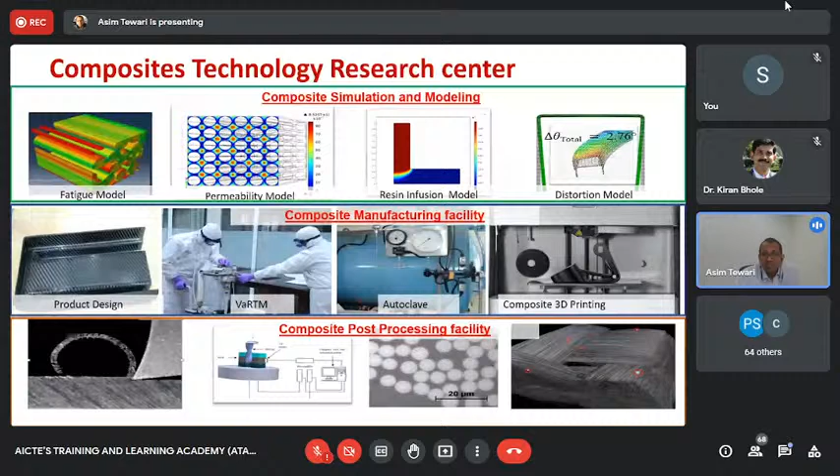So additive manufacturing in composites is also what we do. Then we do tomography, 3D tomography, looking at the microstructure in 3D, machining and post-processing, and also finite element analysis-based life estimation. Another very big area of research in my group is in machining.

We do all sorts of machining, be it milling, turning, drilling. We have instrumented 5-axis machines which can measure forces, torques, temperatures, vibrations, acoustic emissions while performing the machining operation, and thermal imaging. You can look at that and create an understanding of how machining is happening, what are the underlying mechanisms.

We have a lot of experience in machining of titanium alloys as well as machining of super alloys, Inconels primarily, and Invars. So this is another very big activity. We may not really be talking about it today, but it's good to know such things are being done.

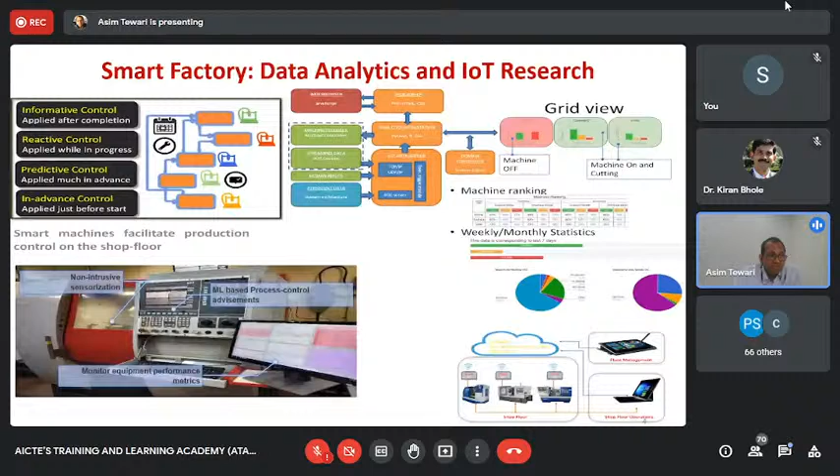Another very big area my group is involved in is smart factory, IoT, and ML. Machine learning and aspects associated with the Internet of Things have become an integral part of our daily lives. We have an entire group developing newer smart IoT devices installed on various systems. They send real-time data to the cloud, and the cloud performs machine learning-based analytics on it. It's a very, very growing field - I'd say this is growing faster than anything else. These are just to show some aspects we're involved in regarding machine learning.

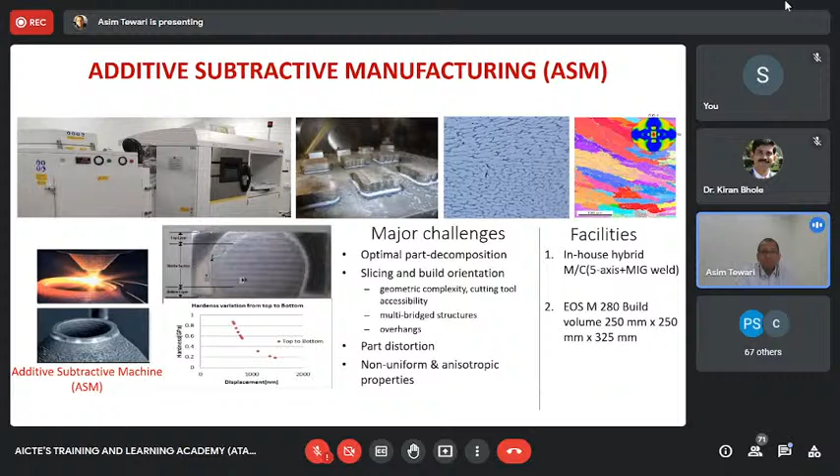This is a 5-axis additive subtractive machine, meaning you can do addition as well as subtraction right in the same machine. It has capabilities of both powder and wire feed, and we can do pretty much any alloy - aluminum, titanium, nickel, iron, even copper has been tried on it. This uses a laser source and is a directed energy deposition based system.

This is, of course, not our machine. What you see is a representative image, but our machine is going to be here by 2022. These are the various things which you can achieve on that.

As I was showing, you have a powder feed as well as a wire feed. The beauty about wire feed is that wires have lesser surface area - at least 5 to 6 orders of magnitude lesser, actually 10 orders of magnitude lesser surface area. Because of that, they do not get contaminated by oxygen.

If you are doing powder-based additive manufacturing, you need to create a very high quality inert atmosphere around it. Whereas in wire feed, you really don't need that, because wire has very little surface area and you can get a very high quality part with very little environment around it. Of course we will still have an inert environment, but it's not as much of an issue with wire.

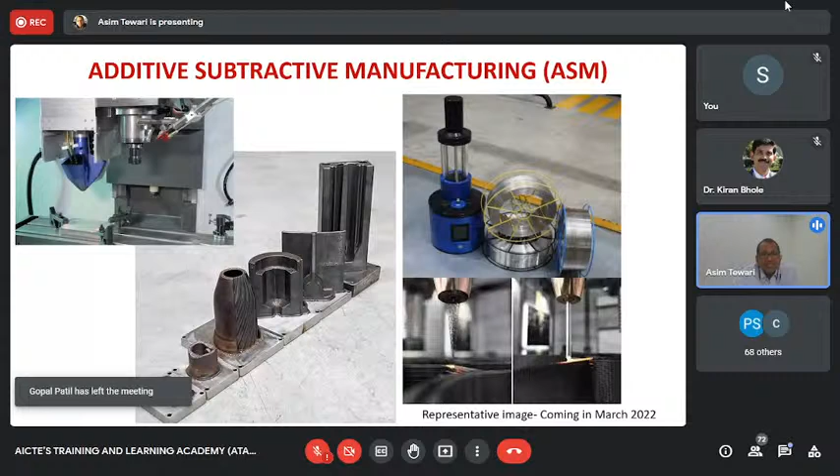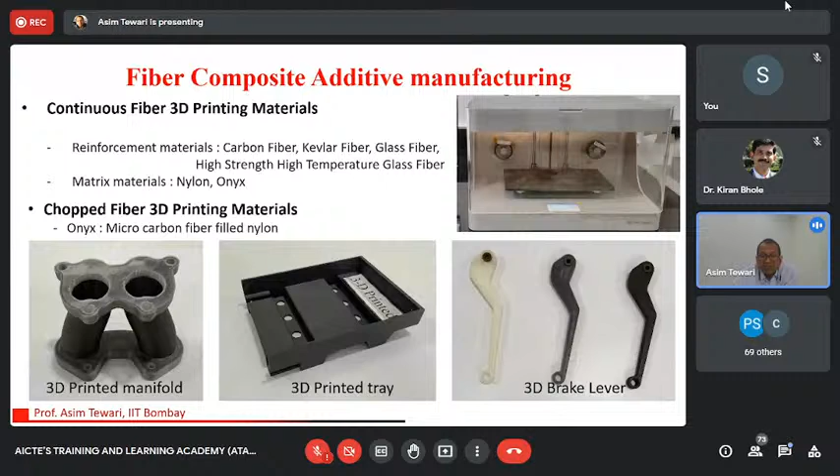So we can actually print carbon fibers, Kevlar fibers, glass fibers, even high strength high temperature glass fibers. There are many different fibers which we can add and print, and there could be many other complexities you can build around it.

Now, coming to what I wanted to talk to you about today - residual stress, which is one of the biggest challenges for additive manufacturing. Let me start with a great real-life story which my center was involved in, NCAIR. This is the drilling-induced distortion.

I would like you to not just listen to this as a presentation going on, but to spend some time and try to understand what I'm showing you right now. This is a very exciting detective novel, in a sense - you're trying to understand what is going wrong.

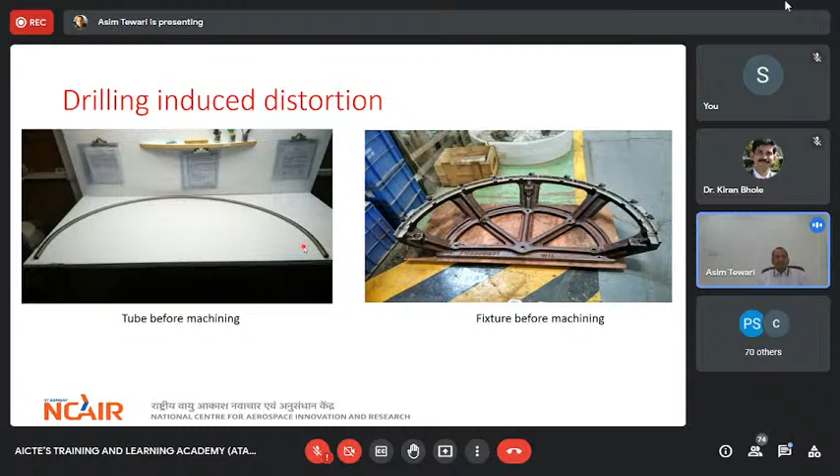So now you can understand, we have this hollow part of titanium made by forging and metal processing. We put it on this fixture and do machining of it. This fixture goes into the CNC machine, and this is the CNC head with the drill tool, and we are drilling holes in it.

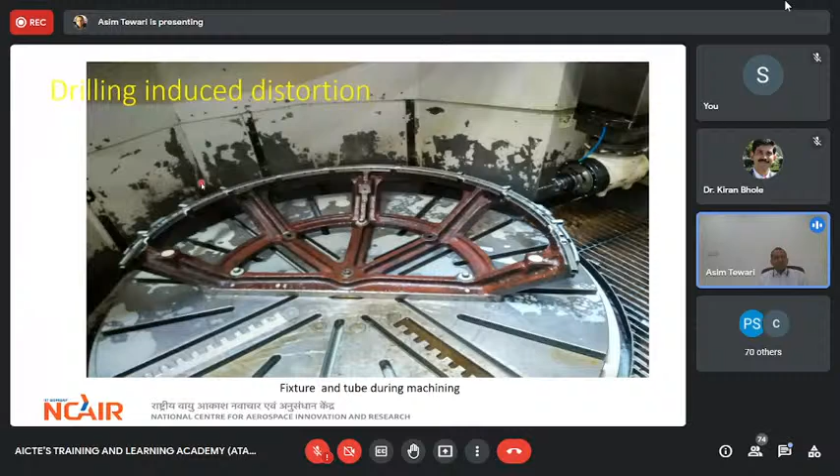When we drill holes in it, everything is perfect. Then when we take it out, it has holes in it. But once we take it out, we see that it has opened up by 20 mm. This is a real life problem. Can anyone think why this is happening?

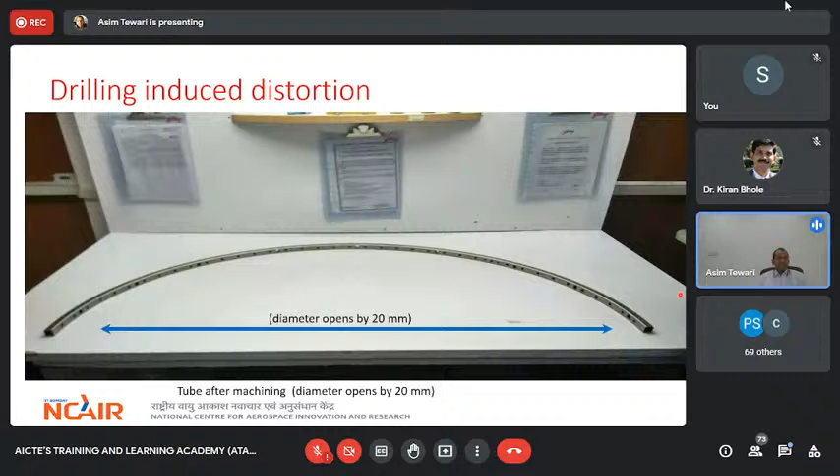What is happening is you have this part, taken to the CNC machine, and after drilling holes, when you take it out of the fixture, you realize it opens up. Why is this happening? This is literally like a mystery which you don't understand why. So if you think about drilling, what you realize is that you are basically having tensile residual stresses and compressive residual stresses.

Both are essentially, in this case, tensile. So you have tensile residual stresses outside and tensile residual stresses inside. This has tensile residual stresses both outside and inside.

What is happening is that because of your machining, you are removing the material, removing part of the material which is outside, and removing it from inside as well. So now we have residual stresses both inside and outside.

In the initial case, they are both balancing each other. The residual stress outside in the periphery of that pipe and the residual stress inside the periphery are exactly balancing each other. Why? Because it's a residual stress - there's no external stress, right? So they have to balance each other out. And since they balance each other out, there is no distortion. It remains like that.

Now what happens is that when you see what is the length inside, you realize the inside arc is smaller and the outside arc is larger in perimeter. Since the outside arc is larger and the inside arc is smaller, the inside has higher stress density due to smaller circumference. So the total forces are the same, but stress per unit length inside is more compared to outside. Now this is a unique understanding.

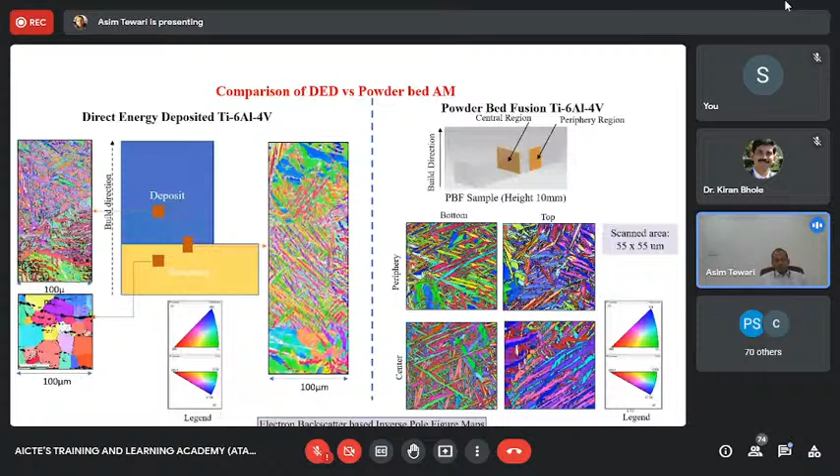We wanted to see how the microstructure looks, and this is how it looks. There's a substrate, and on top of it we have the deposited material. The substrate has a slightly different microstructure from the deposited material, though the deposited material has a somewhat similar structure, with the exact coarseness varying depending on the process window.

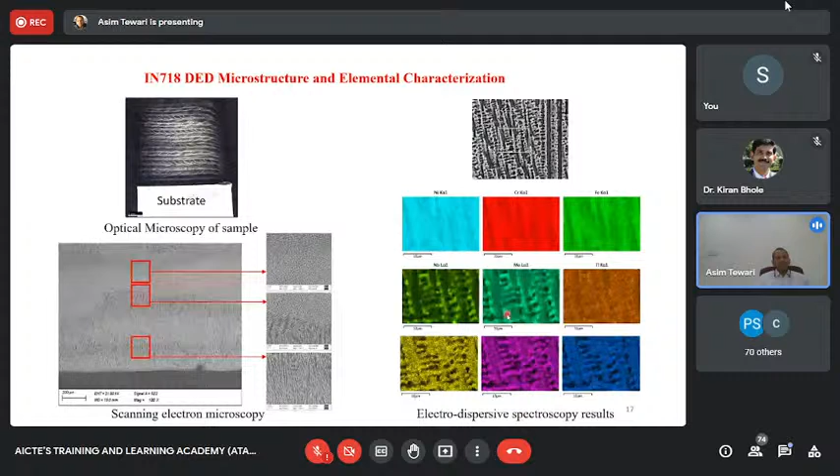This also leads to variations in chemical composition, which is what I'm trying to show you: iron, nickel, chrome, niobium, and moly, and how they change as a function of space. You can see that.

Now, moving forward, we are looking at these samples from a structural tensile point of view, to see how they will perform under structural loading. We performed various process variations, produced these parts, and performed tensile tests. This is just to lay the basic background. I don't want to get into all the experiments, but this is one I want to highlight.

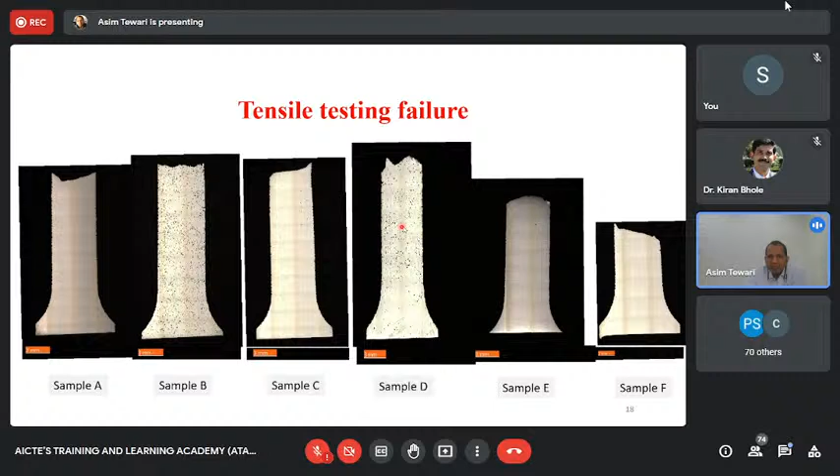If you look at the fracture surface once the sample fails, you can see evidence of porosity on it. If the fraction of porosity on the fracture surface is more than the fraction of porosity in the cross section of any plane, it means the fracture surface is following the porosities, which are getting bridged to form the fracture surface. This is what we see in almost all these samples, that porosity plays a dominant role in leading to fracture.

So that's why we realize one of the biggest challenges in additive manufacturing becomes porosity, and porosity, of course, triggers fracture.

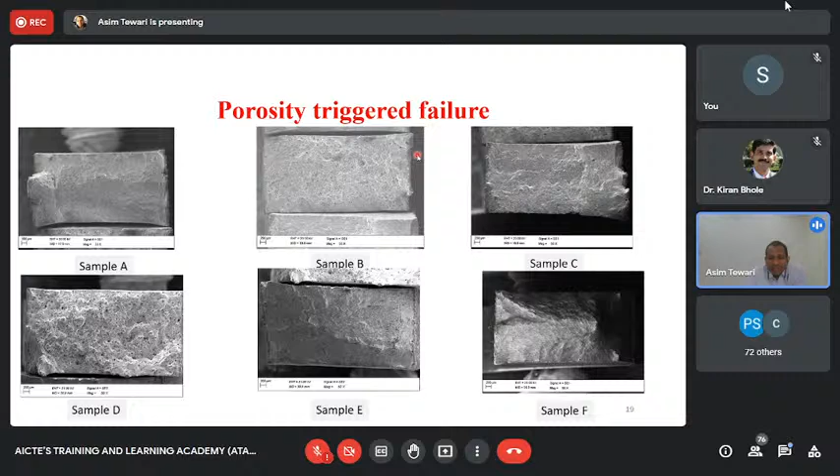Now another very strange thing we have seen is that there are lots of cracks. If you see this, you can see a crack coming. These are additively manufactured parts through directed energy deposition, Ti-6-4 and other materials, and we see these cracks coming in them. This is very strange—why would a crack come? A crack means the material broke.

But it usually breaks when we put it under a tensile test. Here we have not done any of those things, so why is it breaking? That's where we realize it is breaking because of internal residual stress.

There are internal stresses which make the material crack. So the two biggest shortcomings of additive manufacturing for properties are porosity and cracks, which essentially come because of residual stresses. Of course, surface finish is another big issue—you don't get a beautiful surface finish as you get in machining. And that's why we are going for additive subtractive machining.

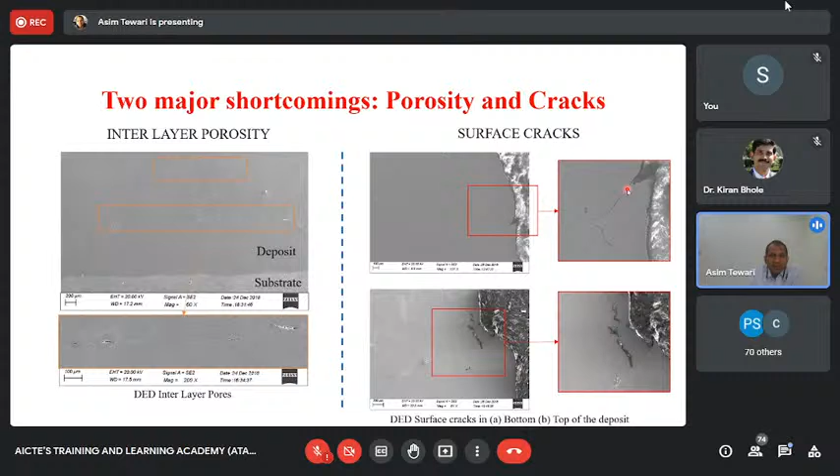So our machine, which we are about to install, is essentially an additive subtractive machine, which will be doing both the additive part as well as machining right on the same structure.

Now, having said that, we have many other issues also, which are really very challenging and very interesting. Those are primarily the CAM issues in additive subtractive machining—for instance, the geometrical complexity, cutting tool accessibility, multi-bridge structures and overhangs. How do you handle that in additive manufacturing?

These things cannot be done on a design-by-design basis. There has to be an inherent algorithm which will automatically provide a solution to these problems.

Now, in 5-axis additive manufacturing processes, directed energy additive manufacturing process, your bed itself can be tilted in any direction. So when you're doing any deposition, you are in a position to turn and tilt it in any direction, and thus you can create any orientation you like, which means you have far more versatile possibilities of build orientation.

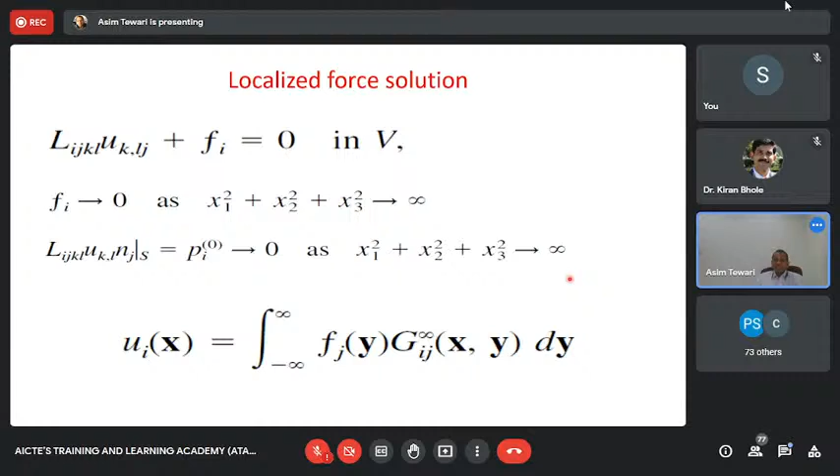Now I've talked about a lot of things, and I don't think you'll be able to follow this completely. But that was the basic requirement, and now we come to the basic understanding of the term eigenstrain. If by the end of today you're able to understand eigenstrain, and that eigenstrain relates to residual stress, then you'll be able to figure this whole thing out. So what did we say?

At a very coarse level, we said residual stress is a big problem in additive manufacturing, which leads to cracking. Additively manufactured parts can crack because of residual stresses—those are internal stresses which break it. Because we talked about stresses, we need to talk about solid mechanics. So I showed you some equations of solid mechanics. After seeing those equations, you'll ask where residual stresses come into that solid mechanics. I just had stress related to strain by stiffness. That's it, basically, no big deal.

So now I'm going to introduce a concept, and the next 3 slides are, I think, the most important slides. Feel free to stop me—I have another 80 slides, but those are not so important. I will share all of this with you, so you'll have those slides. But this one and the next two are the most important slides. This is where your concept of a new term known as eigenstrain is going to come.

Eigenstrain is a generic name given to any inelastic strain. So any strain which is not elastic is called eigenstrain. Can you suggest possible ways eigenstrain can arise? The answer is yes—you could have eigenstrain as thermal strains, phase transformation strains, initial strains, and misfit strains. So any strain having an origin other than elasticity is an eigenstrain.

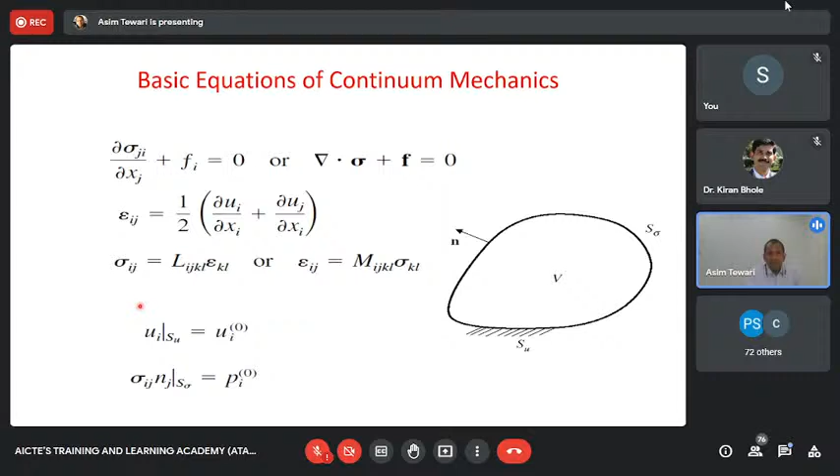All right, afternoon, after lunch may not be the best idea to talk about these equations probably.

So what you realize is that the strain which we called eigenstrain needs to be subtracted from the total strain. Total strain is made up of two parts: eigenstrain and elastic strain. We saw that there was an eigenstrain because of thermal expansion from heating. Since there was no constraint, the material was allowed to expand freely, which means the total strain was also equal to the eigenstrain, which means the elastic strain was zero.

Stress is not related to total strain, but stress is related to elastic strain. This is the main understanding you need to have: stress is only related to elastic strain, and elastic strain is the difference between the total strain minus the eigenstrain. In this case, the total strain was exactly the same as eigenstrain, so the elastic strain was zero, and since elastic strain was zero, there was no stress. Is that clear?

Are you guys understanding what I'm saying? Anyone? Yes, sir.

All right, now I will change the thing. What I'll do is have a part which is not allowed to expand. So it's no longer free, it is fixed from both sides. So I have a cylinder which is fixed from both sides now.

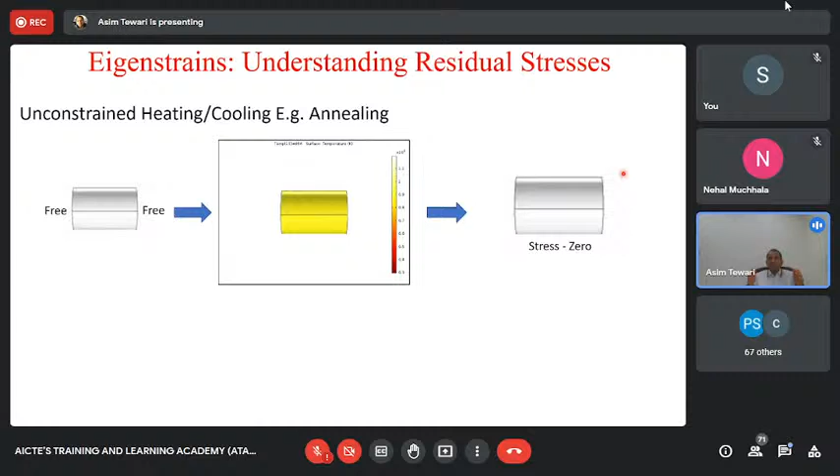So that is the basic understanding you need to have: in the free case, the elastic strain was zero, the eigenstrain was exactly equal to the total strain. In the fixed case, the total strain is zero because it's fixed, and because the total strain is zero, the elastic strain has to be equal and opposite in sign to the eigenstrain.

And what is the eigenstrain? Eigenstrain is the strain because of the expansion from heating. So eigenstrain is always a strain which comes from a physics other than the stress analysis physics. The stress analysis and solid mechanics are not adding anything to the eigenstrain. So the eigenstrain could be either because of coefficient of thermal expansion, phase transformation, or twinning.

There could be many other things which are beyond the scope of continuum solid mechanics, like plasticity. Of course, you can add this as a part of solid mechanics, but it's essentially coming from some other physics. So that strain will be provided to you by some other physics. This quantity, eigenstrain, is given by another physics. In this case, that physics is coefficient of thermal expansion, but it could be something else as well. Is that clear?

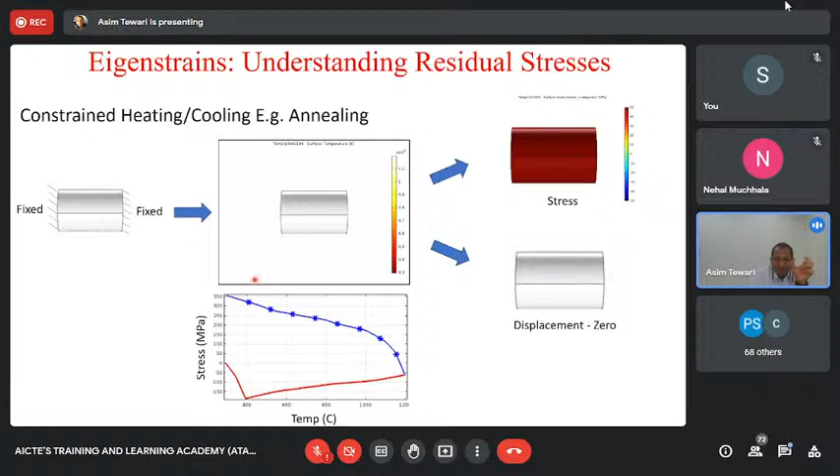I hope it is. Now I want to show you how the stresses change through a heating and cooling cycle. You go through a whole process of heating and cooling. What happens is that if you do heating, it may expand so much that, since it's fixed, it may yield. If it yields and now you cool it, it may actually become smaller in size. That's one of the key aspects you need to realize.

Another simple thing to understand is that the average stress in a volume, in this case the entire sample, is given by a traction boundary condition. If there is a force applied on my system from outside, given by sigma ij not nj, meaning a force in the I direction, then what I will see is a body with an average stress given by this stress tensor. Sigma ij not nj is the force I'm applying in the I direction. If the sample is under a traction boundary condition given by this force, then the average internal stress of the body, integrated over the entire volume, is given by this quantity.

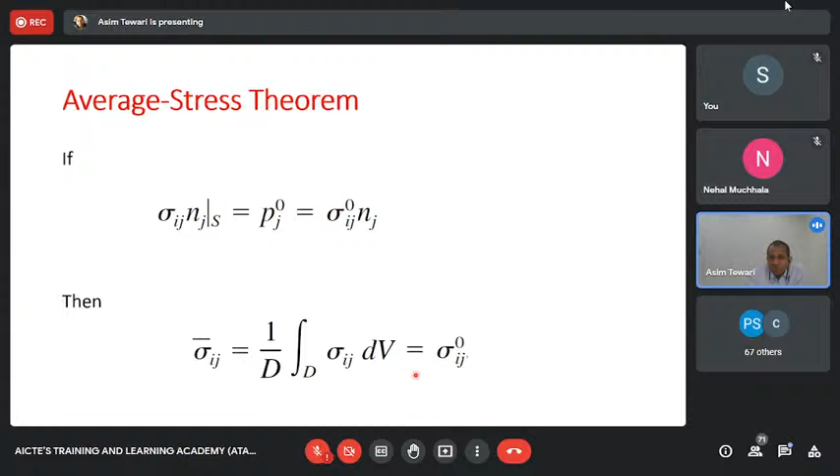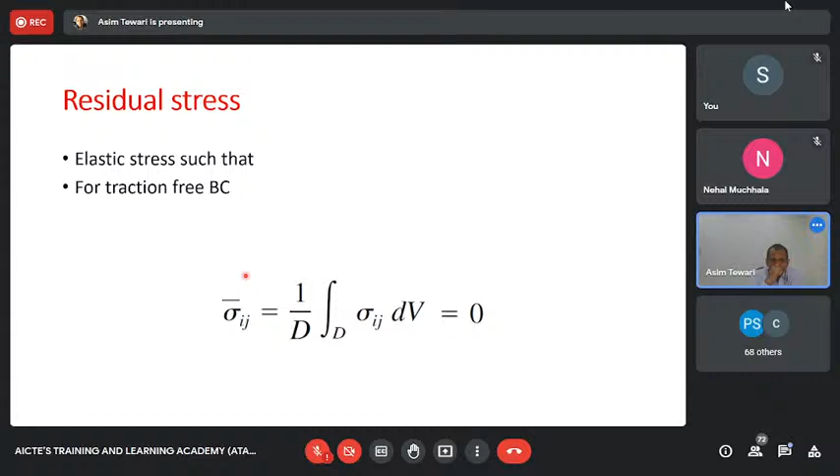Why am I talking about this? Because in a residual stress state, there is no traction - it's a traction-free boundary condition, there are no external stresses. Since there are no external stresses, this term is 0. That's why the average stress in a residual stress field, the average residual stress in a body, is exactly equal to 0. So if you have a tensile stress somewhere, you will also have a compressive stress somewhere else, so that the volumetric average of all those stresses becomes exactly 0. That's one of the key aspects you need to appreciate.

Let me now talk about the key aspects which play a role in the formation of residual stress. There's a moving heat source, which leads to a transient solution, and that creates complexity - it's essentially the same in welding, which I'll talk about in more depth. Phase transformation: you could have ferrite to austenite, austenite to liquid, liquid to austenite, austenite to ferrite, pearlite, martensite, bainite, tempering of martensite and bainite. All of these solid state and liquid-solid transformations could lead to a change in the eigenstrain, thus leading to stresses. So eigenstrains could be because of phase transformation, solid-liquid transformation, thermal expansion, or constraints from the outside, and they can also change the entire strain - not the eigenstrain, however, because eigenstrains don't really care about external constraints.

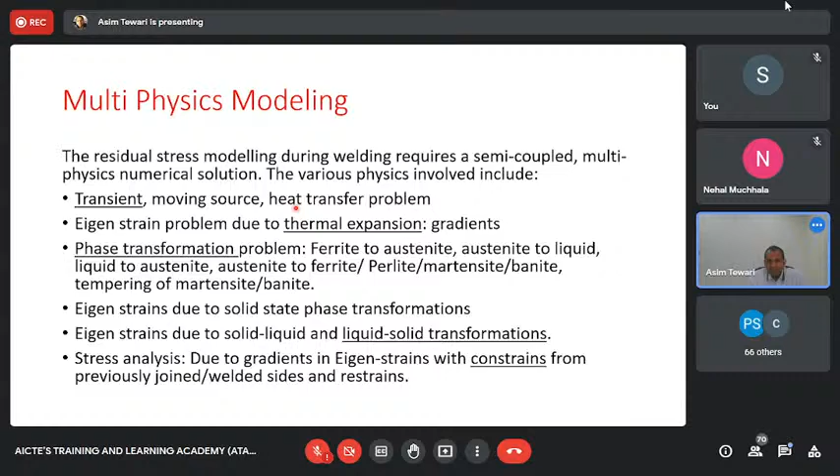This is a very simple model, and I'll talk about a more complex version when we get into finite element based modeling. This is a very, very simple 3-bar model, which is often used in welding. What this model shows is how welding results in residual stress.

The question is, when you're welding two parts - let's say you're not adding any filler material for simplicity, you're just heating a part - that part gets heated up, then it melts, then it solidifies, and that's it. Now you'd expect it to have residual stresses. The question is, do you really expect residual stresses just because you heated it up from room temperature to high temperature, and then cooled it back down to room temperature?

So you've brought it back to the same place where you started from. And if you've not added any material, should it still have residual stresses? The answer is yes. It will have residual stresses, provided that when you heated it up, it went to a place where irreversible transformations happened.

Let me talk about what is happening. This can be handled by a 3-bar arrangement: bar 1, bar 2, bar 3. These are just to show you how this material is being modeled. The welding gun goes from the center, and when we do that, the center part will get molten, while the other two bars will just get heated up but will not melt.

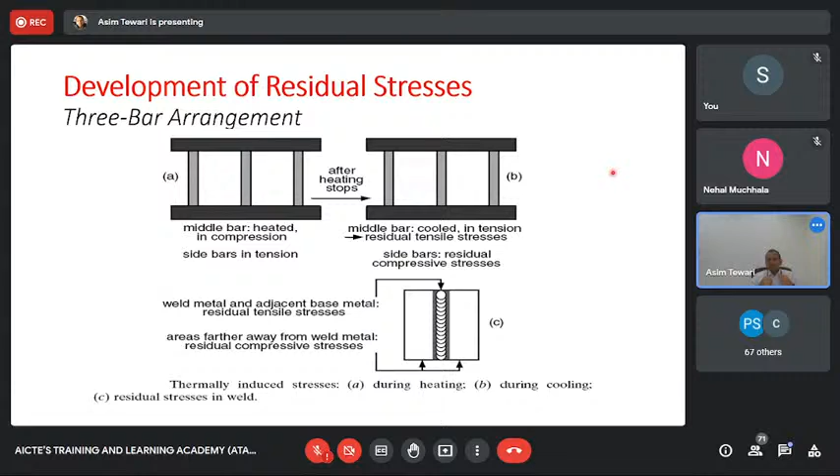Probably I've been speaking a lot. You hopefully get a picture.

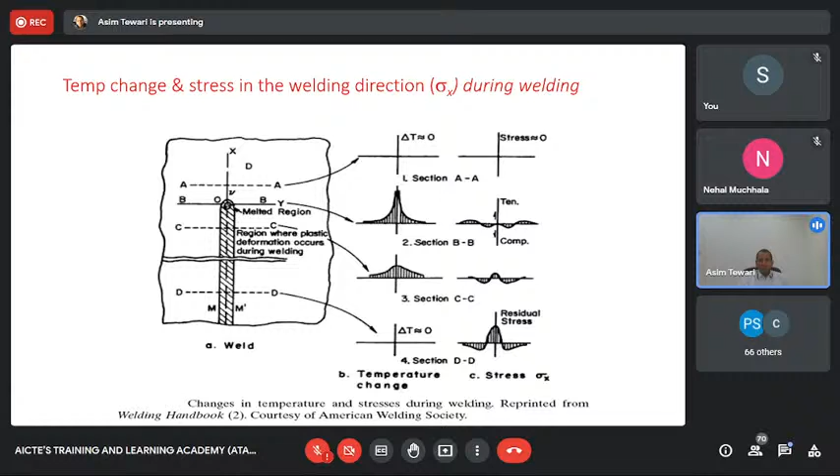Now, had there been no melting in the central pool, then we could have avoided residual stresses, but not always. Why? Because residual stresses didn't happen just because of melting, but could have also happened because of plasticity. And that is another more complex aspect beyond the scope of today's discussion. So coming back now, this is how the residual stresses in butt welds vary. Residual stresses vary like this.

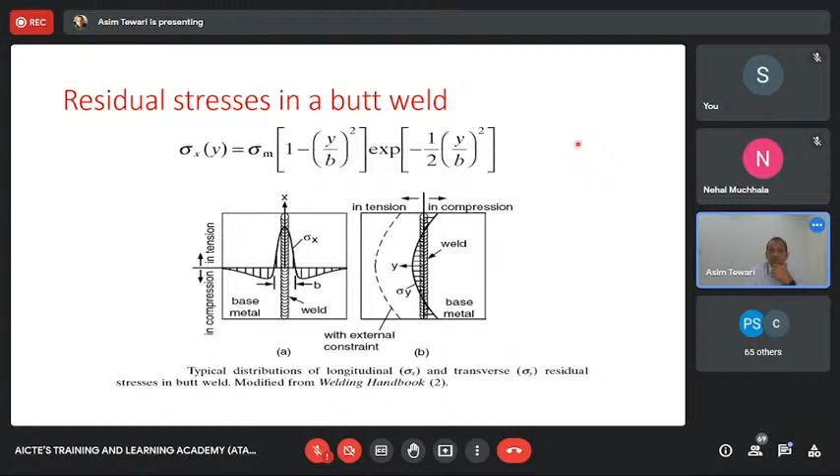And why does this happen? This happens because of many mechanisms. One of them is that heat is provided, and this is leading to what has happened. So what is happening is that you are having heating, and the heating is causing the atoms to move, and the stress goes through a stress relieving process.

So the temperature exposure at a long enough time causes the heat to relieve residual stress. And there are many mechanisms involved. Plasticity is one. Why? Because when you heat it up, the plasticity of the material falls down, the yield stress falls down. Another mechanism is creep, in which the material starts flowing because of creep. You also have stress relieving because of dislocation movements. Your dislocation mobility increases. So a lot of things happen which lead to reduction in residual stresses when you expose something at a high enough temperature for a long enough time.

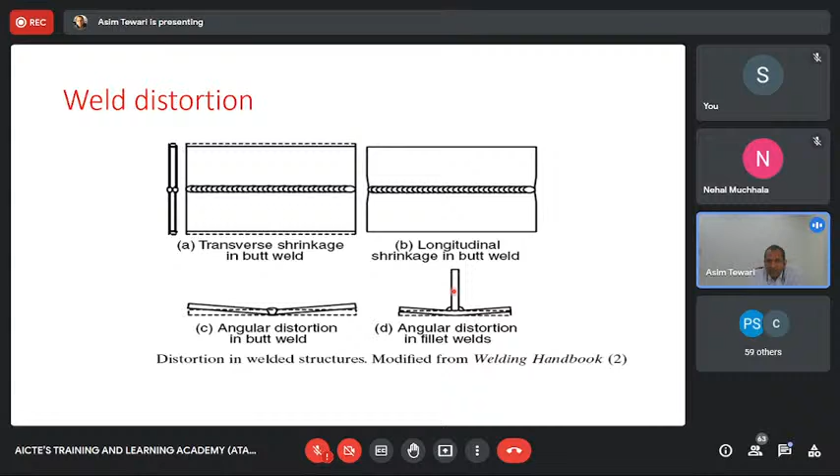Now I'll quickly talk about what kind of distortions you'd expect. If you've seen the three-rod case, you should understand how residual stress leads to distortion. Looking at this plate, the center has been welded from the top, and once it cools down, it creates a tensile residual stress in the center. The tensile stress pulls everything down, and because of that, the originally flat plate becomes distorted like this. You can think of the same for a T-joint, which leads to similar distortion.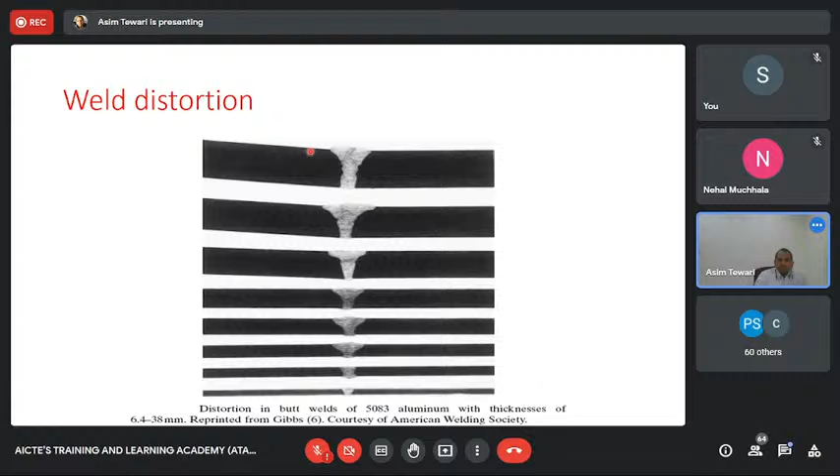How would the distortion be affected by thickness? If it's very thick, you get large distortions. What are distortions, by the way? They're nothing but the stress relieving of residual stresses. Distortion happens when the residual stresses are asymmetric. The moment you take it out of the fixture, the asymmetric residual stresses relieve themselves, leading to distortions. So a distorted material has fewer residual stresses, but the geometry is unacceptable. A very thick part leads to larger distortions; a very thin part leads to much less distortion. This shows how the filling and other things change.

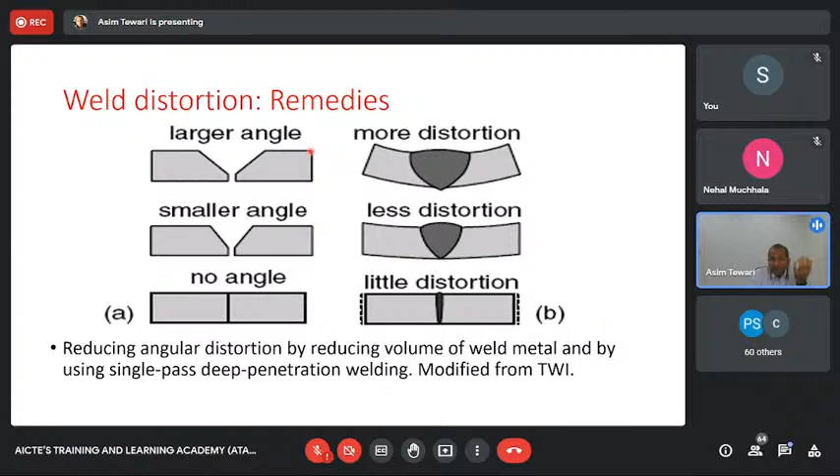Now this is for welding, but not very different things happen in additive manufacturing, and that's where additive manufacturing strategies come into play. This shows how various welding strategies are changed - adding material here, then there, adding all on one side first then the other, versus adding once below, once above, alternating - and you realize this has much less distortion.

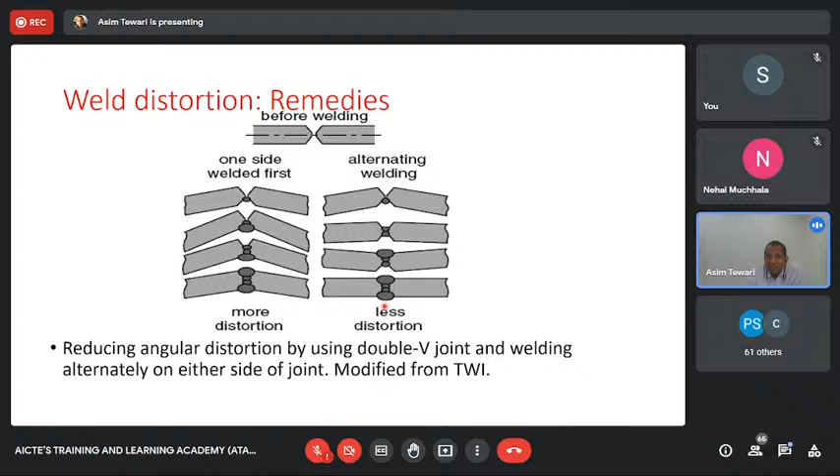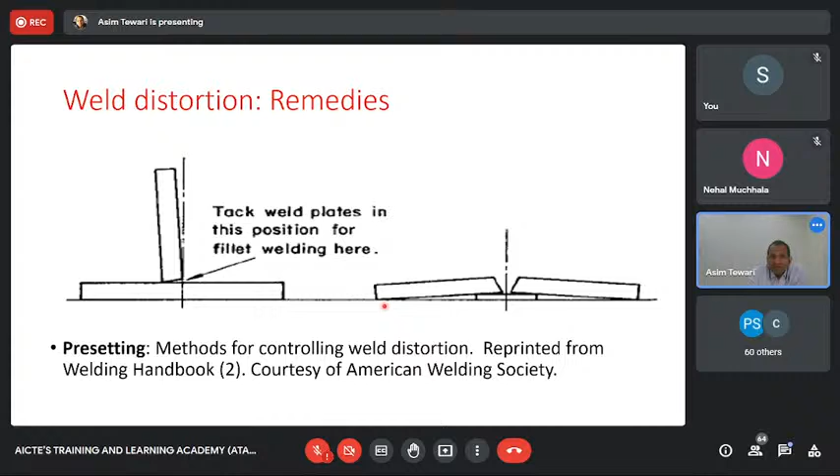Now, you need to realize that having no distortion doesn't mean you have no residual stresses. As a matter of fact, you could have more residual stresses, and you're likely to have more if you had no distortions. This can happen in more complex geometries - I don't want to go into these details. You could design it such that you start with a slightly deformed part, and when you weld or join it, it leads to the final designed shape after going through distortions.

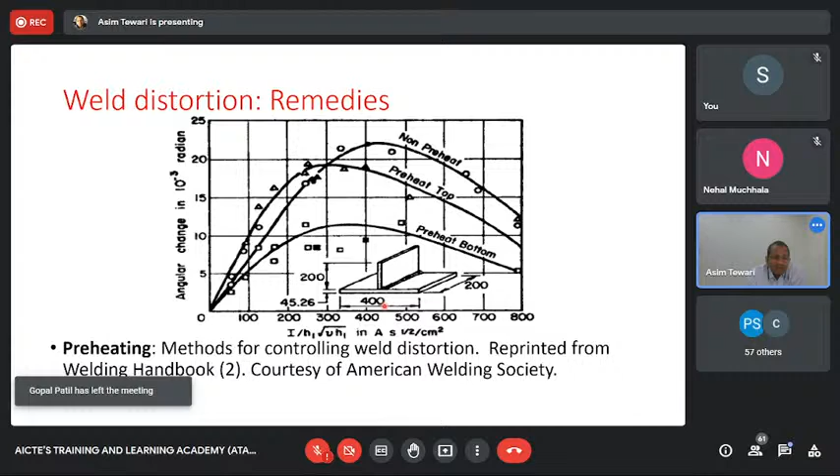Of course, fixturing and preheating is another thing you can do. And these show some aspects of how angular change leads to different kinds of distortions.

Now coming back to additive manufacturing - we talked about residual stresses coming from the mechanics of eigenstrains. I hope you now understand what eigenstrains are. Eigenstrains are inelastic strains, and they are responsible for residual stresses. Of course, the stresses finally have to come from the elastic strains only. If you let the material expand or distort freely, there will be no residual stresses, however there will still be eigenstrains. If you constrain it or self-constrain it, that leads to elastic strains, which is nothing but the total strain minus the eigenstrain, and that leads to residual stresses.

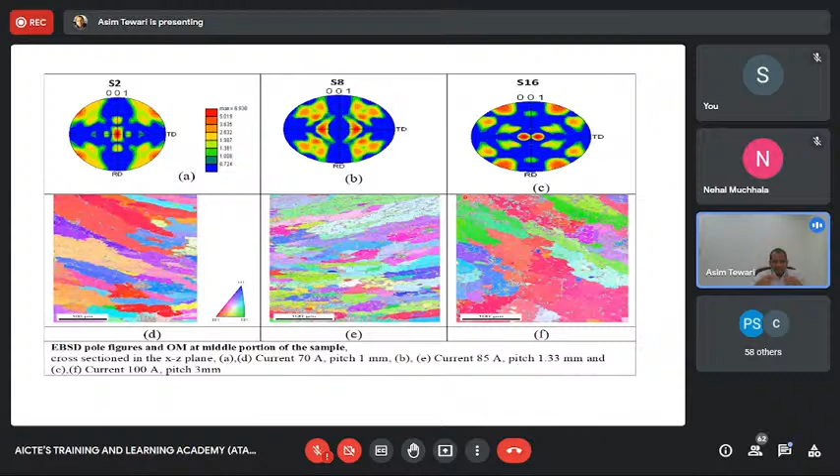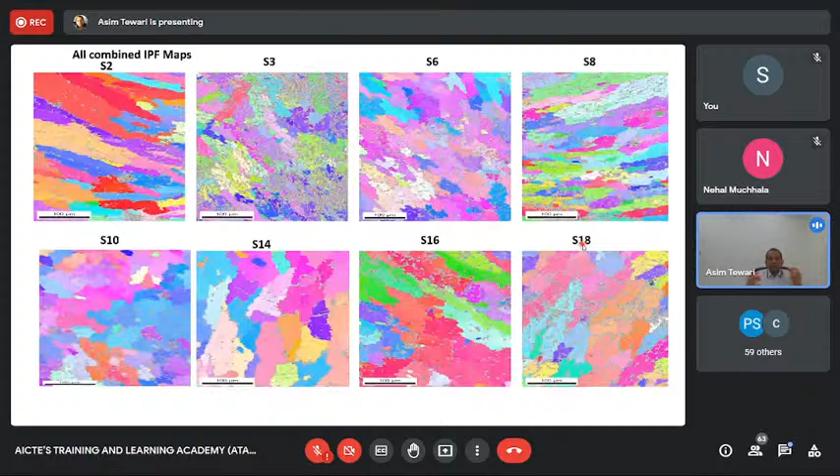But what is most important is what I wanted to bring out to you, which is these residual stresses. Now, you can measure the residual stresses by X-ray diffraction, and there are many other ways in which you can measure residual stresses.

Why? Because if they go beyond the yield stress, yielding will happen. So no residual stresses can go beyond yield stress. So that's the basic idea behind the residual stresses, and of course the microstructure would accordingly show variations.

So then coming to find, once we have this, what does this tell us and how can we now model this? That is where the main challenge comes. So essentially what we need is to perform a modeling, and I'm just showing you one aspect, and then I'll get into a slightly more detailed aspect of what we do in terms of understanding and exactly predicting these. So what you're seeing is that as you are heating, and you're having a heat source which is moving, the heat source is never a flat heat source.

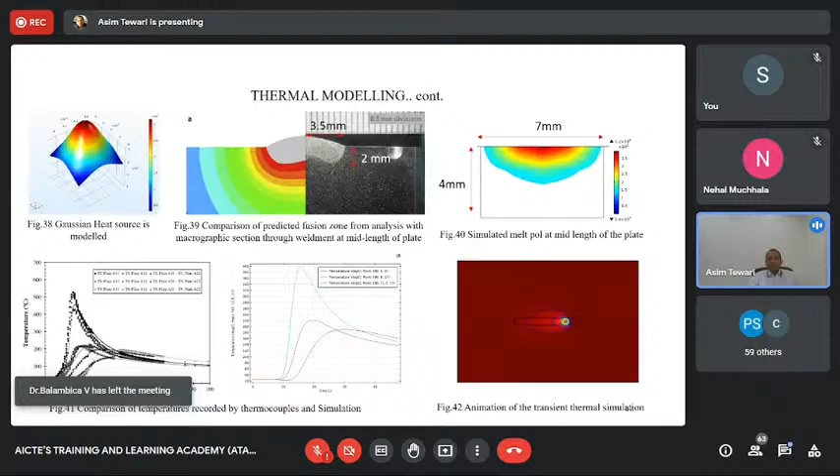Once you have modeled the heat source, you need to do the thermal modeling of the entire part which you are additive manufacturing on. Finite element is now very advanced in doing thermal modeling as well as structural modeling. I just showed you the equations which you need to solve for the structural modeling.

Now remember, the regular finite element packages are not necessarily trained to handle eigenstrains and residual stress creation. You can introduce residual stresses.

Is there a question, or is someone? If there is a question, please ask me, otherwise you could just mute yourself. Yeah, Leela ma'am, you have... Yeah, okay, all right, yes, that's okay, please. So you can have finite element analysis based thermal and structural modeling performed, in which you are solving the heat transfer equation and solving the solid mechanics at the same time, and this need not be fully coupled. This need not be fully coupled because you are not really having... Leela ma'am, please unmute your mic. I think the organizers can mute them also, so you don't have to point out any. Yeah, I will do the needful. Sir, yeah, so there could be some problem. I know that it happens when you're having these things happening, you could get unmuted accidentally.

So the finite element can be used to model both the heat transfer and the thermal aspects as well as the structural aspect, and they need not be fully coupled, which means that the heat transfer can happen independent of the structural modeling. The reason is that the heat transfer is not being changed because of any structural variation. However, structural variation is certainly changing because of heat transfer. So this is a one-way coupling of thermal modeling to the structural modeling, that makes life much simpler.

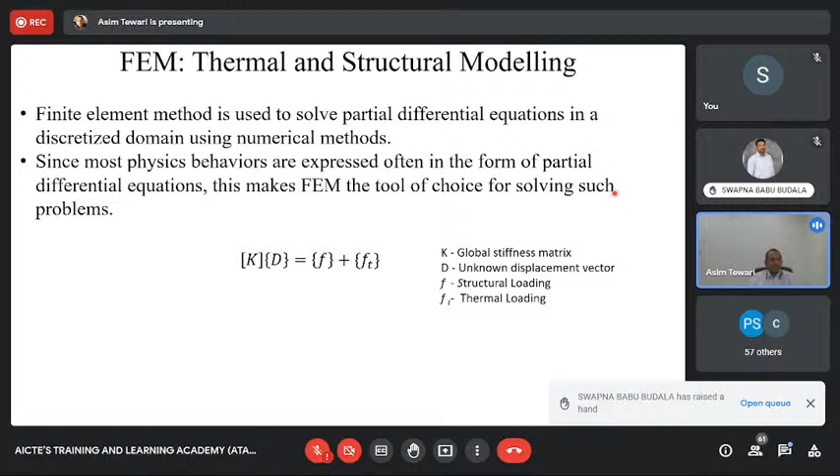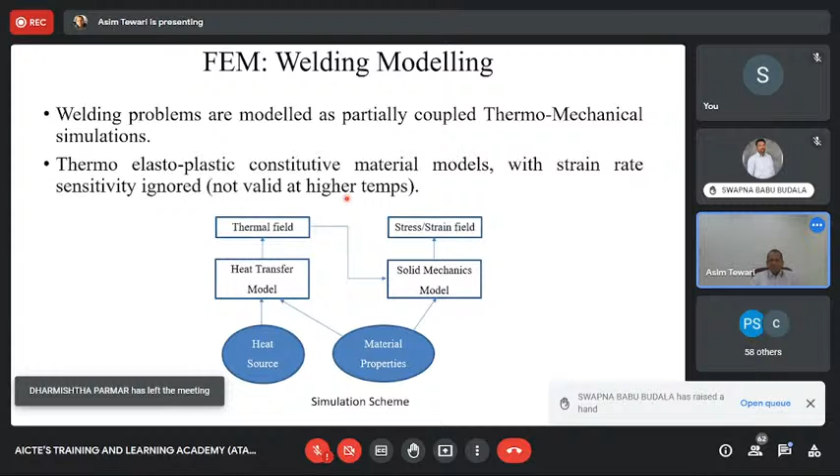So this is what we validated for welding and additive manufacturing, and I'll show you some of the simulations. So you have thermal fields, you have a heat transfer model, which leads to thermal fields, and those thermal fields lead to strains. And those strains, based on constraints at the boundary, if it's a no traction or no displacement boundary, will lead to stress strain fields. So this is the overall aspect of the modeling of the stresses and the thermal aspects.

However, apart from stresses and thermal aspects, what you realize is that there is also a phase transformation which can happen. So now this is understanding residual stresses from the finite element perspective. You can see stresses on the left-hand side and the temperature on the right-hand side. And as you see, as the temperature is increasing, actually the stresses could fall, could increase. So there are a lot of different things which could happen.

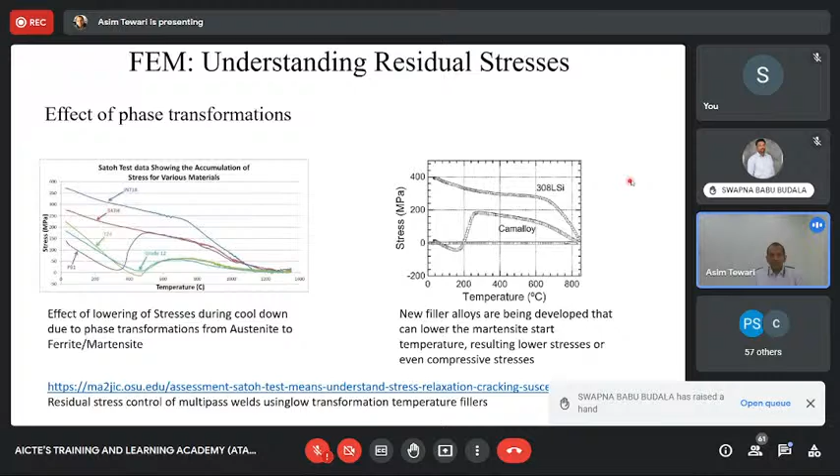Now, what you need to realize is that this entire process is having one-sided coupling from the heat transfer model to the solid mechanics model. But the solid mechanics model is also being coupled with the phase transformation model. When you have austenite formation, there's a volumetric change. When there is martensite formation, there's a volumetric change. And these volumetric changes will create eigenstrains leading to residual stresses. So you need to model them at the same time.

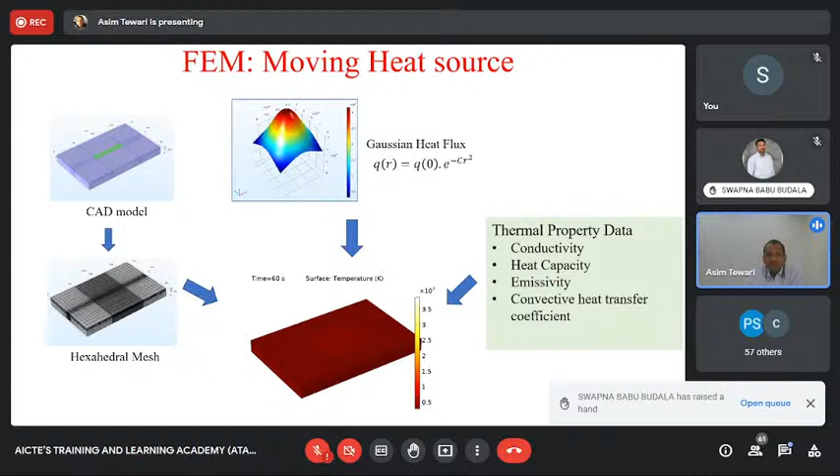So now let me quickly show you the complexity which comes because of the phase transformation modeling. This is what is happening in terms of phase transformation. You are having a materials model, especially in this case for maraging steel, and this maraging steel is going through austenite to martensite phase transformation, following this expression. And what you see is that this is the model and this is the experimental result. Blue is the model, red is the experiment.

As the temperature is changing, the material expands, but then suddenly goes through a reduction and then again expands. Why is this happening? Because this is martensite in the beginning, and the martensite is expanding with increase in temperature. The moment you reach a temperature at which martensite transforms back to austenite, given by this expression, it becomes austenite. Austenite is an FCC material which has a lower cell volume, higher density. Martensite is body-centered tetragonal, which has more volume per cell and thus less density, so it's more voluminous. The moment it forms austenite, it goes through a reduction in volume, and the strains fall.

So what you need to realize is there's a thermal expansion which is causing these strains to grow, but there's a phase transformation which causes this strain to fall. Then, of course, if you keep heating it up again, the newly formed phase of austenite goes through its coefficient of thermal expansion, leading to this. So this is the heating cycle.

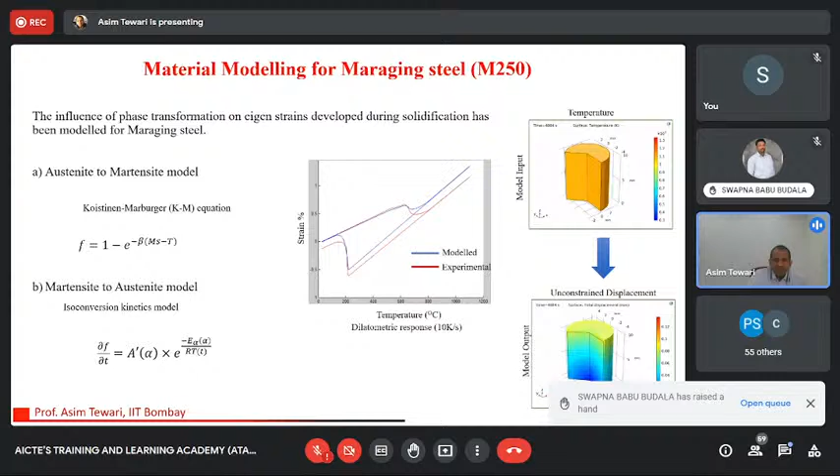If I started with martensite and heated it up to this temperature, I will have this strain. But if I started with austenite and I'm cooling down, then at the same temperature I'll have a lower strain - which means you need to know the history, not just the current state, to know the entire eigenstrain. All of this eigenstrain, depending upon the boundary condition, will lead to residual stresses. So that's the bigger picture you need to understand. Once you put all of these things together into a finite element model, you essentially will be able to get something of this kind, which will tell you how the temperature is varying and how the melt pool is varying, and thus see how the temperature fields and the stresses are varying.

Now, this is essentially a simulation of a single heating, moving heat source, a single streak of heat which is there. In this case, to validate this, we used welding. Why welding? Because welding is a well-known process. You can very nicely instrument it, and a single bead of addition of weld material is same as additive manufacturing.

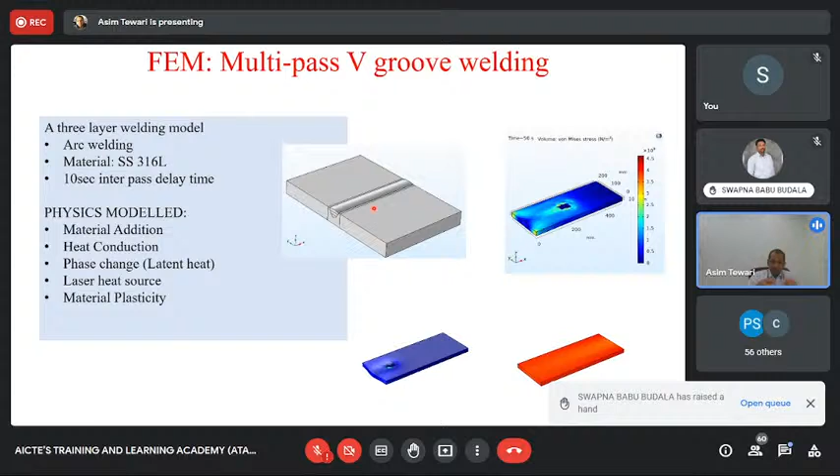If you do multiple of them, it becomes your additive manufacturing. So now we can perform this by various multi-passes, not just one pass. We can add one pass, two pass, three pass. In this case, 3 passes. And in each pass, when you pass and add and do that again, the temperature of the substrate is no more the same, because your previous pass had heated the material up.

Now what you realize is that the temperature is also causing the properties to change. So as you heat the material, the yield stress falls, the elastic stiffness falls, the Young's modulus falls. Thus you have to take into account all these complex things at the same time, not just the heat transfer and the eigenstrains, but the stresses also, because the stiffness is changing. And stresses are related to strain by the stiffness, right?

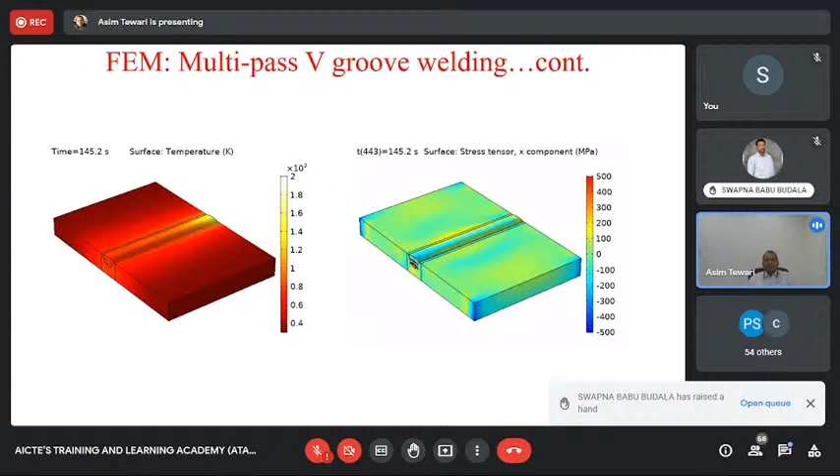So now if you put this, this is how the actual residual stress variations can be seen on individually added sections. Now for this, what we did was that we performed actual experiments in bulk V grooves, and we added the material in a welding process.

And this is probably the most, I would say, authoritative experiment where we were actually adding welded material step by step and keeping track of how that welded material is changing the temperature, how that welded material is changing the distortion and stresses and everything.

So what we did in this case was that we constrained the plates from the side, and we had thermocouples all over the place which could measure the temperature at different locations of the base metal. And then we had a thermal camera on top, capturing the temperature.

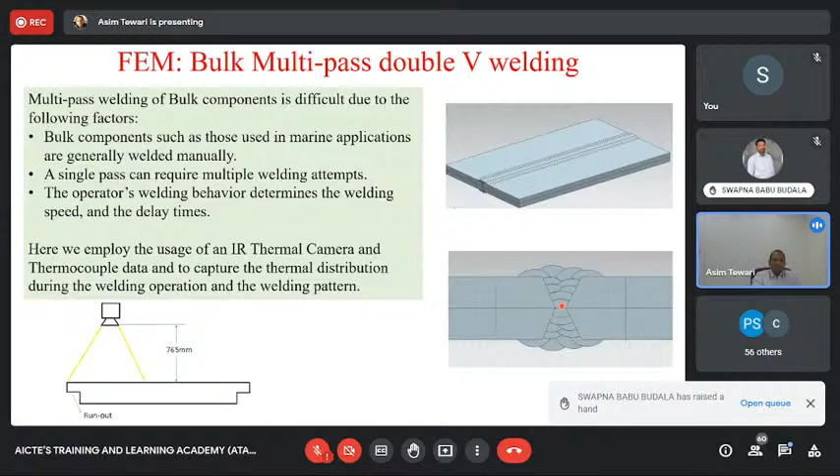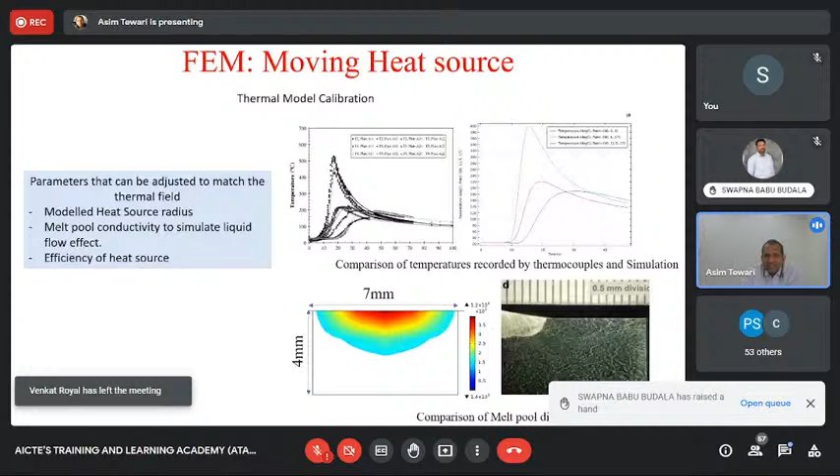So you have now an experimental way to measure the actual temperature which is formed while you are adding a single bead. And the same can, of course, be done through simulations. When you do the same through simulation, you can see how the temperature variation is actually occurring. So you can exactly see the temperatures from the simulation, and map it with the experiments. What I'm trying to tell is that we now have a very powerful experimental tool which is used to validate our multiphysics numerical models which we have developed.

Now these two put together would provide you the understanding of the residual stress formation. Now going beyond residual stress, this can be used for many other purposes. So you could use it for purposes like understanding what should be the total amount of heat extraction which you need to do. You may also want to use it, for instance, to see how much cooling you need to have to not have a sensitive part become heated up.

You could also look at it and see what kind of strategies of build you need to have. So what kind of hatching strategies you need to build, for instance, which could be used for minimizing distortions or minimizing residual stresses. So now it is up to you to figure out what really you want to do with this. But essentially, you have all possible ways in which you can create the process variables and optimize them to get the exact structure, get the exact weld details which you want, and all of those.

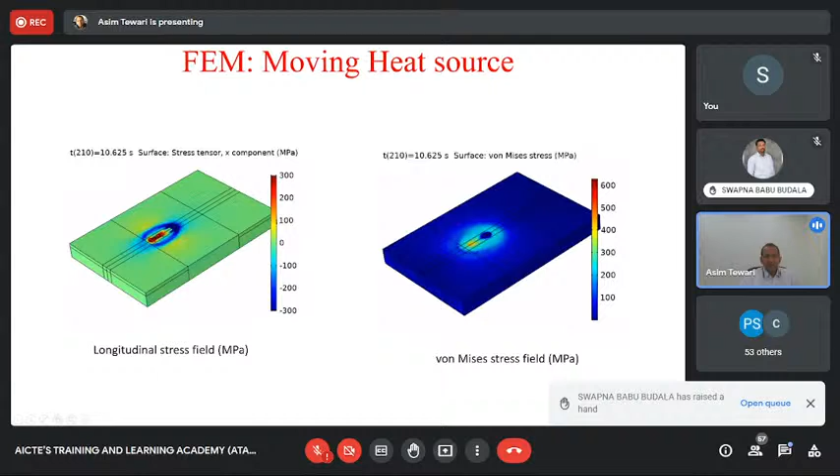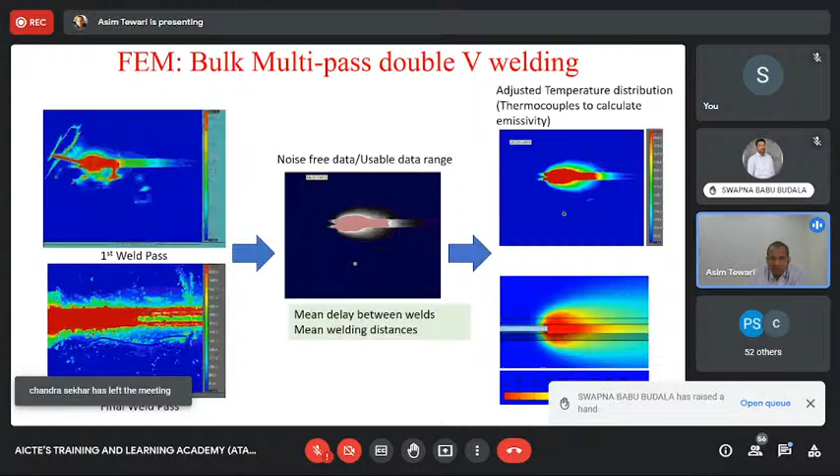So now these are the actual experimental thermal values which we calculated, and then we looked at how the residual stress would be varying. This is where we have added about 20 odd layers going from one to the other, and these are the layers being added one after the other.

Build strategies could be different. You could add layers 1, 2, 3, 4 all over here and then add on the other side, or you could add a few here, then there, and vice versa. What you see is that the residual stresses are now a function of this, looking at residual stresses along this line and along this line, on the two sides.

So these are those two curves. One is for one side, the other is for the other side. And what you realize is that the two are not exactly the same. If this line is very, very close, the residual stresses are higher. If this line is taken further away, the residual stresses become much closer to zero.

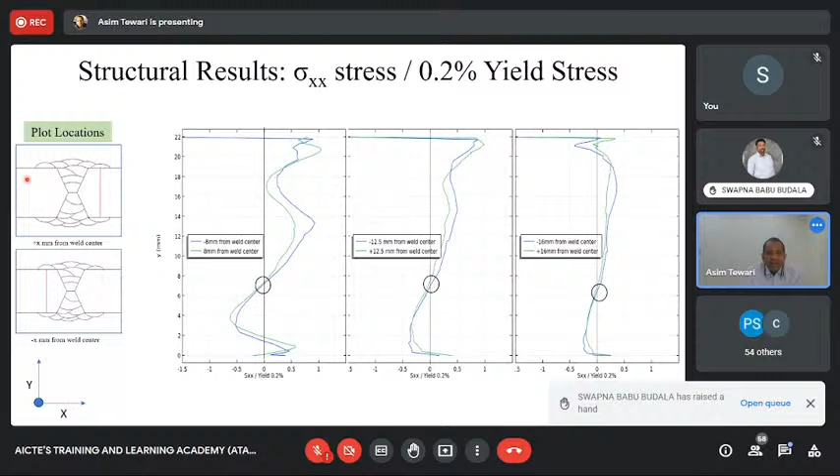But what you need to realize is that they are not symmetric top and bottom. So the top is not exactly an inversion of the bottom, and the two sides are also not the same. So you are creating some very unique asymmetries in your sample when doing additive manufacturing. You could look at each of those individual parts which you've added and figure out which would be the most appropriate thing to handle this.

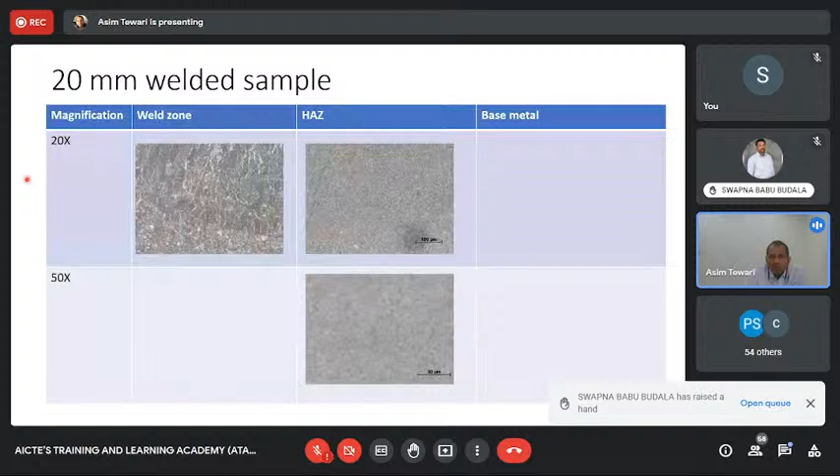Now, what you also get are some very unique microstructures, and I want to talk about that a little.

But before that, I want to talk about how this, what we did for welding, is now being used for powder bed as well as directed energy deposition additive manufacturing. And now the aim is to essentially have an entire model where we can change the power, change various build strategies, and see how it is changing.

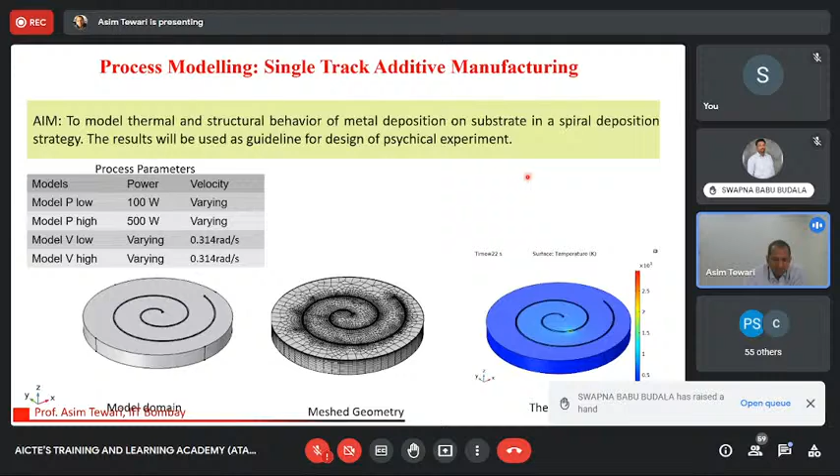And this is what we are doing right now - adding layer by layer material based on our build strategy, based on our power, based on our velocity and all those things. And we are seeing how the temperature is varying and how the residual stress is varying.

So this is something which needs to be done before you actually start building the models in your machines. The reason is that in the machine, number one, it's very expensive to do that. Number two, in the machine, you don't have a way to measure residual stresses right away, because they are internal parts. That's when it can lead to distortions and cracks internally, but you won't be able to measure those quantities which you could do in these simulations.

So these are some of the leading algorithms which we use, which is a combination of eigenstrains for solid mechanics, phase transformations, heat transfer, and phase transformation - both solid state and liquid state phase transformation. All of this put together leads to a clearer understanding of how the residual stresses are being formed. Can they lead to distortions and can they lead to cracking? This can be used to optimize the additive manufacturing process, because it's an open question.

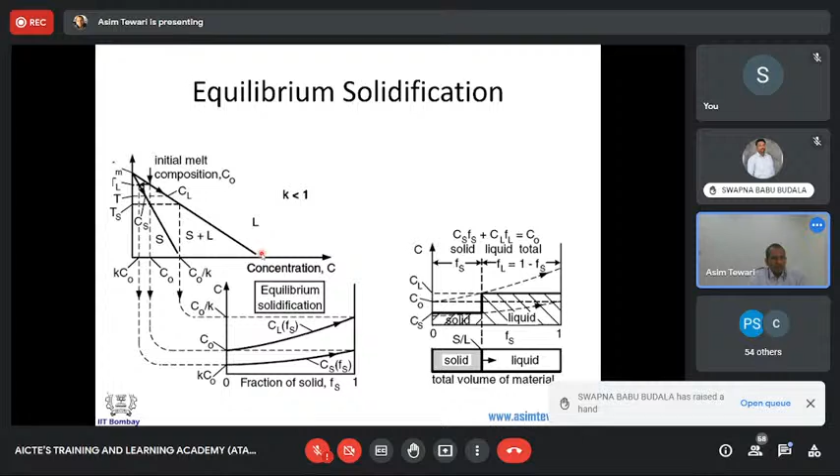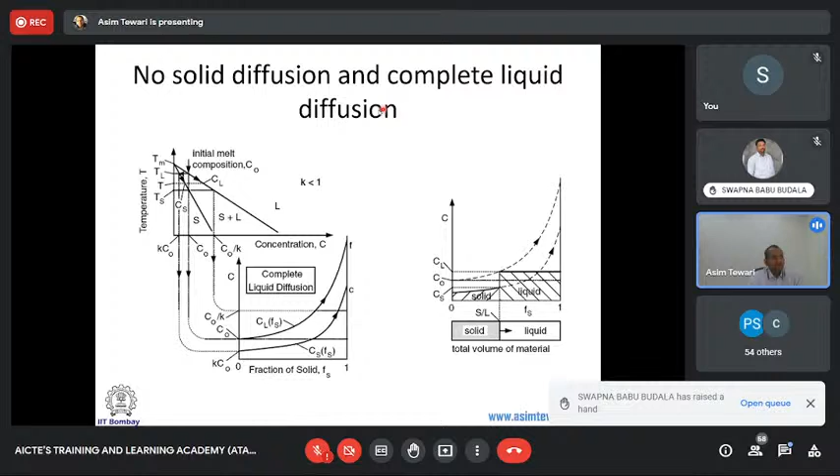So what I want you to appreciate is that depending upon how you are cooling, you will have segregations which will happen. If you think about composition C0, when you're cooling down, your liquid will initially be at this temperature where the first solid will form, and the final solid will be this. Thus you'll have a gradient in your composition, so the solid will not always be of the same composition. Depending upon the rate at which you're cooling, you could have different kinds: complete solid diffusion and complete liquid diffusion, no solid diffusion and complete liquid diffusion, to no solid diffusion and limited liquid diffusion. All of these things can happen, and this is how the chemical profile of the solid and liquid would vary. So you need an intricate understanding of the entire process of solid solution partitioning and solute partitioning in the phase diagram to appreciate that.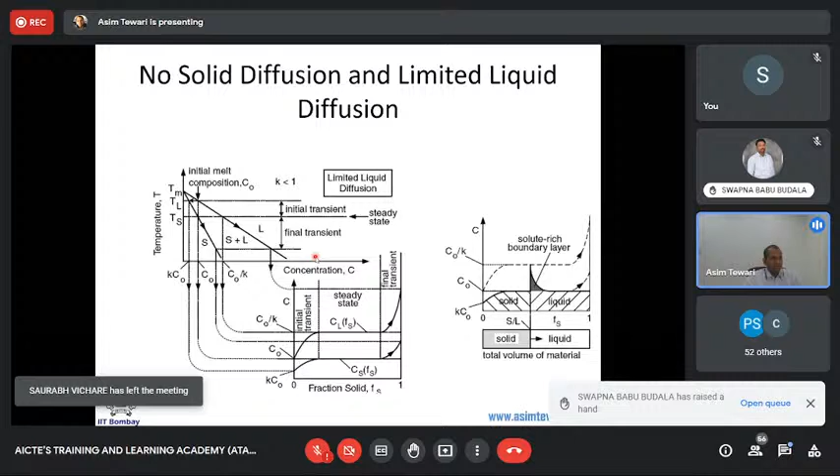And this becomes paramount when you are having very fast solidification. Everyone wants to build very fast. Now in additive manufacturing, since you are adding only a small amount of material, you could actually have a very high rate of cooling happening as well, and that could lead to more complexities. So your solid phase could have a compositional variation.

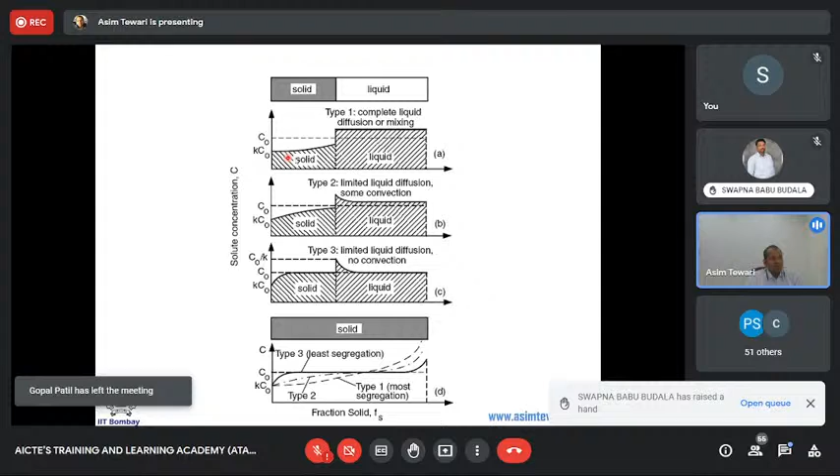Liquid could have another composition variation. When you have a melt with another solid in its vicinity, which happens in welding and also in additive manufacturing, you start having growth, which is an epitaxial growth. That epitaxial growth leads to the liquid metal growing on the previous layered grains. So when a new layer is added, it grows on the previous layers, and that's how grains grow on the previous layers. This is dictated by the crystals of the previous layers.

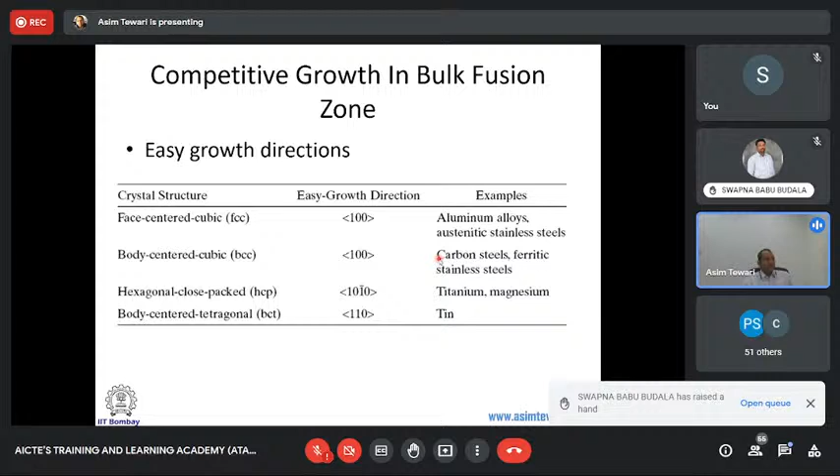But those crystals of the previous layers are very soon taken over by the competitive growth because of the orientations. So the direction of your build is dictated by the geometry, but that also dictates the thermal gradient, and the competitive growth starts happening because of the thermal gradient and the orientation of individual grains. So you start having very complex microstructures forming.

So what you now need to understand is that not only are distortion and residual stresses important, and those can be mitigated by your process variables, but your process variables will also have an immense effect on the underlying microstructure. Thus, you need to optimize your process variables not just to keep residual stresses low, but also for a specific microstructure.

So now if you see, this is telling you what the individual grains are and why the grains are growing like this. The grains are growing like this based on the competitive growth between thermal gradients and the orientation.

This could be the other aspect - this is for almost a pure metal. For a pure metal, there is only a single phase, so it's liquid and solid. Liquid solid has almost no gap. Whereas for an alloy, there is a gap, a melting region.

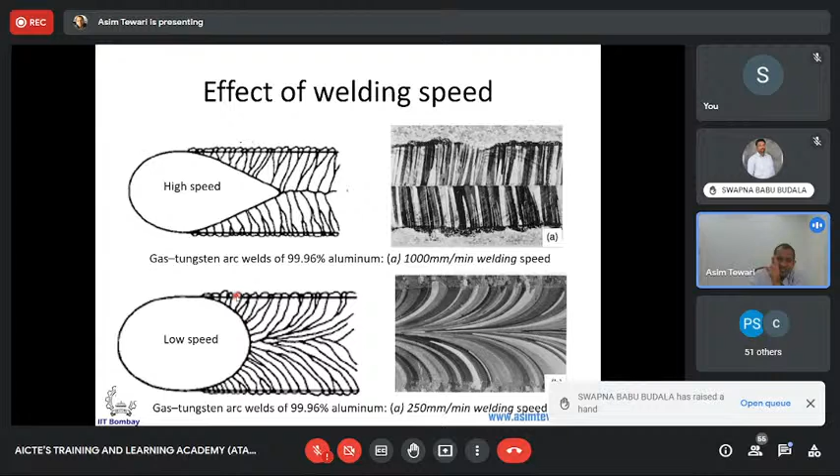This is where it is both liquid and solid, which is the mushy zone. So the solidus and liquidus temperatures are different. When you go from a single element to an alloy - the previous one was almost pure aluminum - when you go to an alloy, that will lead to a slightly distorted, different kind of microstructure. So the same process window for a pure metal versus an alloy versus another alloy, depending upon the range of solidification, could create very different structures.

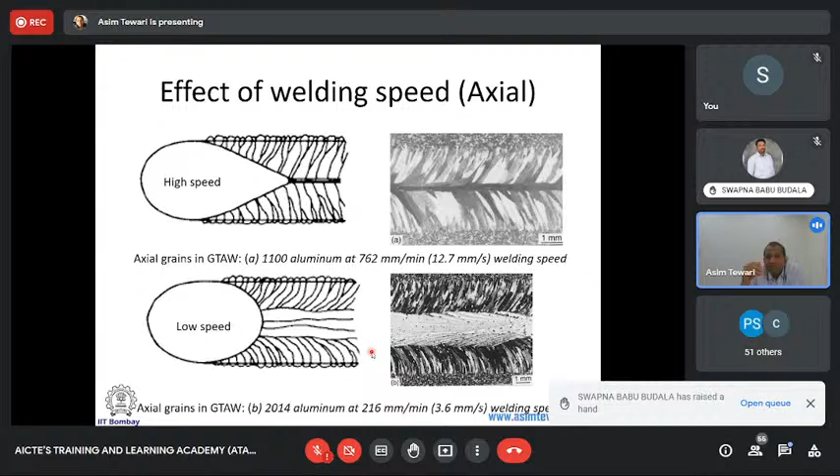So once you are forming a single bead in additive manufacturing and going forward, within the melt pool you have large variations of temperatures, and those large variations of temperature lead to large variations of phases. So you have solid outside, complete liquid inside, and in between you have a mushy zone.

Now, having said that, just a mushy zone is not sufficient, because you are also having a very large fluid flow which occurs in these liquid melt pools. The previous modeling I showed you was a macro modeling where we were ignoring these effects, but we also do modeling where we look at the individual melt pool model.

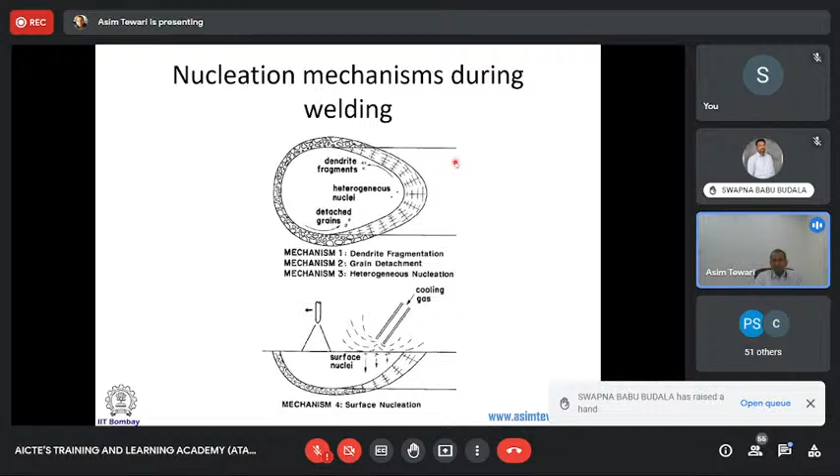All of them put together lead to different structures. You can see these individual microstructures which are getting formed because of the three mechanisms I talked about - dendritic fragmentation, grain detachment, and heterogeneous nucleation. These can be used to explain all of these structures.

Now in this structure, what you see is a further added stray field. So while performing additive manufacturing, you could actually add a magnetic stray field for stirring. Additive manufacturing is still a very big growing science - you are not just doing things by adding layer by layer, but you can do many other aspects of things around it at the same time.

Why? Because the biggest challenge of additive manufacturing was porosities and coarse microstructure. That can be completely taken care of with this. So now what you realize is that you have two problems in additive manufacturing: one is cracking and distortion because of residual stresses, the other is because of porosity and poor microstructure.

The distortion and cracking is because of residual stresses, and you can mitigate it from a macro model. However, the porosity and microstructure can be mitigated by the micro model. That micro model will essentially lead to specific changes at the melt pool level, leading to better microstructures. Whereas at a macro level, the hatching strategies by which you add material will lead to lower residual stresses. So you are actually controlling the additive manufacturing process at two levels.

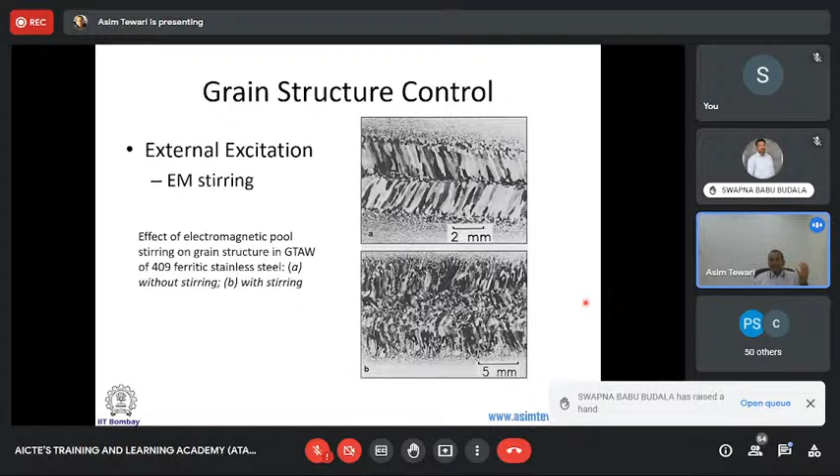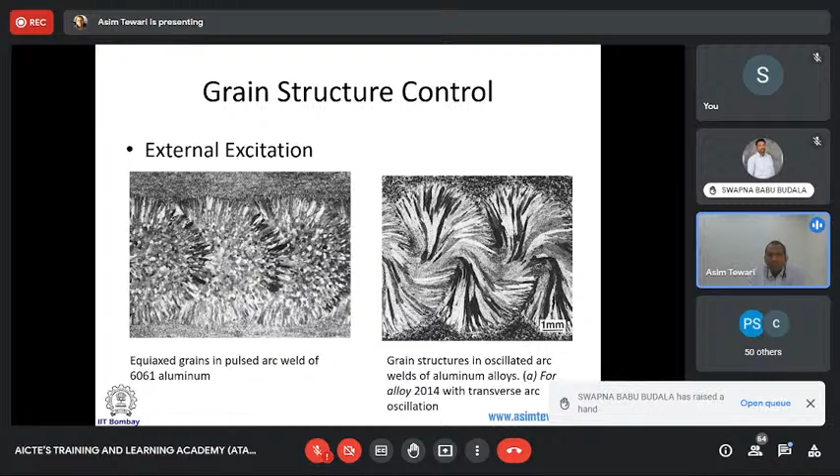Now, all of these new developments, when added to additive manufacturing, can create additively manufactured materials which are far more strong and have far less distortions compared to regularly additively manufactured materials. However, unfortunately, these developments are still not streamlined for the manufacturing processes. So you can't really buy a machine which will let you do this kind of additive manufacturing right now.

But the kind of research we are doing, both in terms of modeling and experimentation, we are introducing these and creating what I would say is new age additive manufacturing, where we are incorporating different kinds of additive manufacturing processes in the field itself, in the machine itself. Just to show you one more example - this is something which my colleague Professor Karunakaran did.

This was a process in which he started using a hammer, a pneumatic hammer, to impart mechanical distortion, mechanical work on the additively manufactured part. So this pneumatic hammer is causing hammering to the newly additively manufactured layer - a kind of thermomechanical, mechanical treatment to the additively manufactured layer.

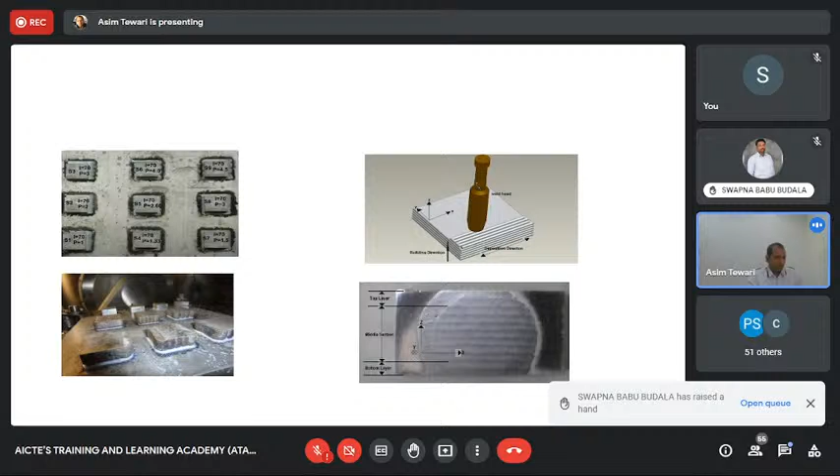Now, the other area which I didn't talk about, where we are interacting with a company for additive manufacturing, is the role of single crystal growth. What I showed you a little while back on the epitaxial growth of the additively manufactured part - we can use this same concept in a completely different space.

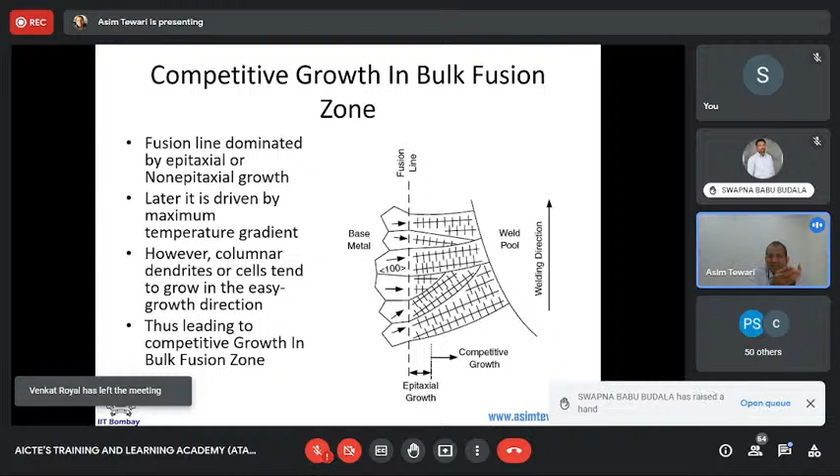So once you have the next layer in additive manufacturing added, the melt which is formed when it starts solidifying forms on the same crystal which was there in the previous layer. So that is the epitaxial growth which we can have here - the previous grains are what are growing.

This is being used very successfully in additive manufacturing for repairing single crystal gas turbine blades. These blades are a single crystal - the entire blade is made up of one grain, but it may get chipped off due to usage in gas turbine engines, jet engines. So you take these blades out, but they are very expensive to make, so you don't want to throw them away if they have just a small chipped part.

What you can now do is use additive manufacturing to grow the same grain epitaxially. So the single crystal grows back again, and you have a single blade made up of a single grain with no chipping anymore. You can machine it finally after growing that grain to get the right finish. This is another very big process being used right now in additive manufacturing.

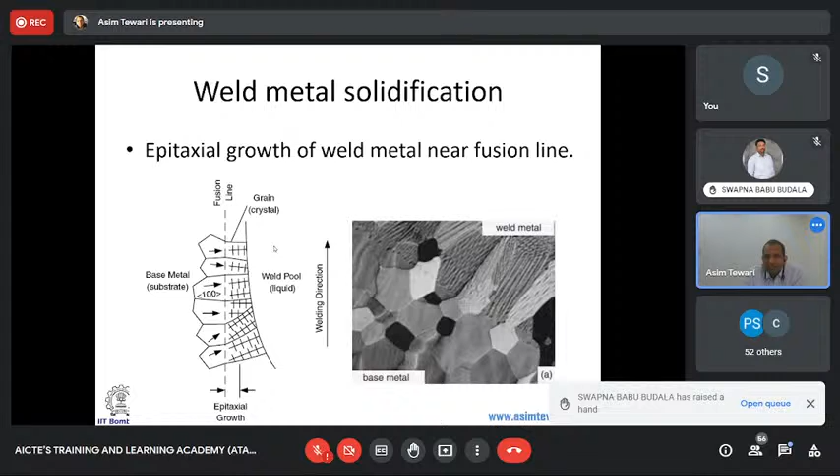Good evening, sir. Yes, please. My name is Fahim, and I am a research scholar at Thapar Institute of Engineering and Technology, Patiala. I'm working in FDM technology with PC, polycarbonate, and other materials like ABS. I face the same issue because of these residual stresses. The talk was very informative, and I got a lot of information from you. Thank you so much for that.

I get the same problem, residual stresses are there, and there are defects like warping, or we can say curling. I want to know how I can control that in the FDM printer, during FDM printing of PC and ABS.

So essentially, there are two things to do. Distortion is what you don't want at the end, so distortions could be mitigated in two manners. One is that you could build with a strategy where the residual stresses are such that they lead to nullifying the distortions.

Imagine if you have this plate, and it's distorting this way. So you make it such that it will have residual stresses which will distort it the other way also. You have competing residual stresses which lead to distortions in both directions, thus nullifying the distortions. This is one strategy.